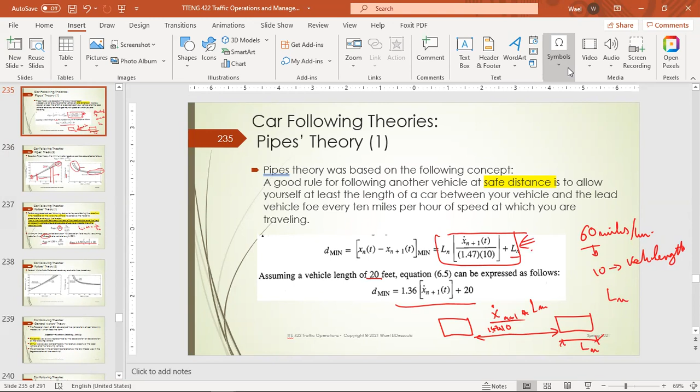When comparing the results of Pipes' equation with the field data, we can see that he is underestimating the safe time headway compared to the observed data, and also the safe distance gap at high speeds. He is underestimating the safe distance, and at low speed also he's underestimating the minimum safe distance headway.

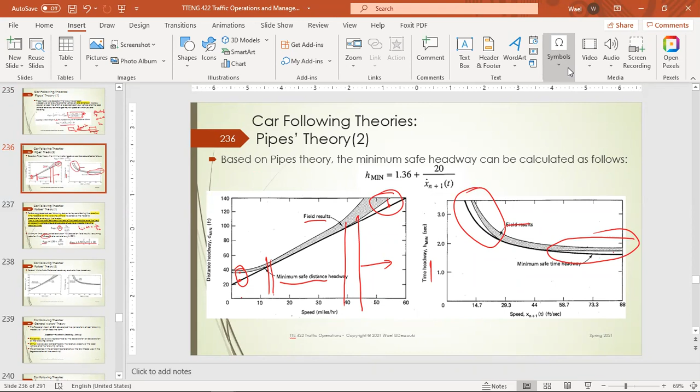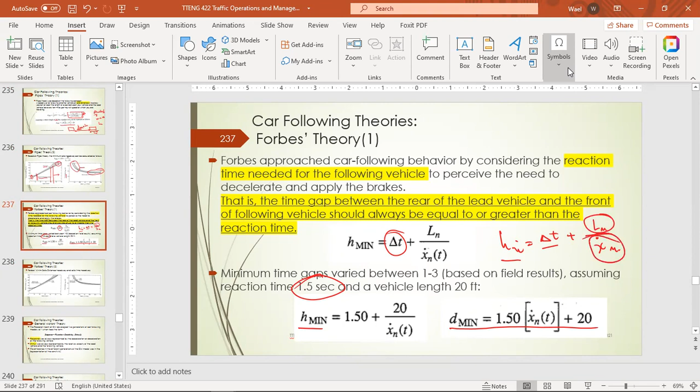However, later on, Forbes proposed something different. He said that reaction time is the governing factor, and the following car usually tries to maintain a distance gap proportional to, or a function of, the reaction time needed. So he mentioned that the minimum headway will be delta t, the reaction time, plus vehicle length divided by the speed of the lead vehicle.

When comparing Forbes with the field data, we see that he was able to treat the high speed minimum safe distance headway well. However, in the mid-range he was too conservative, but at low speed he was not conservative. As you can see, there is inconsistency, and both Forbes and Pipes models suffer from one major issue, which is their linear relationship. However, in reality, the field data shows there is non-linearity in the relationship.

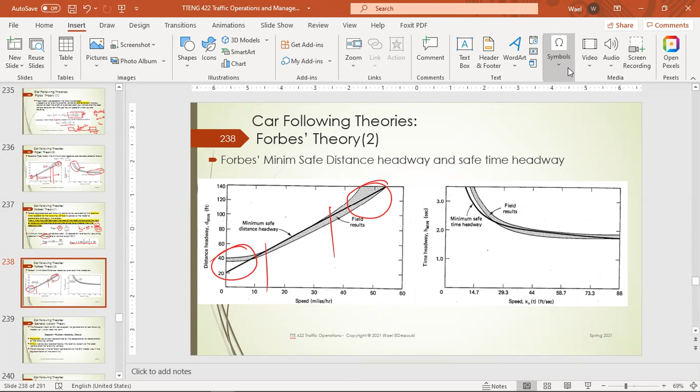So the third approach was started by General Motors, and they built their theory on the following: that the response of the following car is a function of sensitivity and stimuli. What is the stimuli in this case? Basically the response is either acceleration or deceleration. And the stimuli here was always delta x dot, the difference in speed between the lead vehicle and the following vehicle. Sensitivity, that's basically the key in all five models.

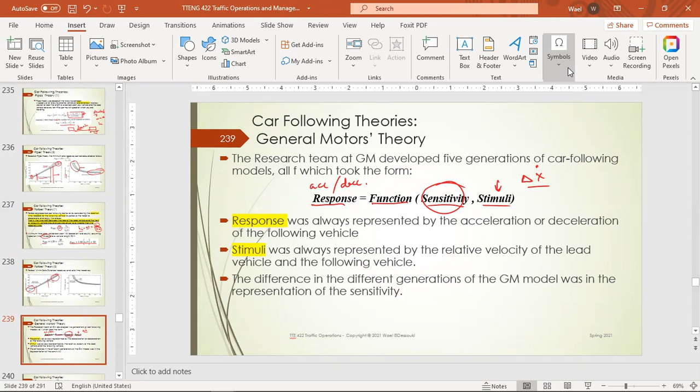That's the key difference in the five models developed by General Motors. So we can see here the first model: it said that the response, which is basically the acceleration of the following vehicle, equals alpha, a sensitivity factor, multiplied with the difference between the speed of the lead vehicle and the following vehicle. From field data, they found that the minimum reaction time is 1 second, the maximum was 2.2, and the sensitivity alpha ranged from a minimum of 0.17 to 0.74. The average was somewhere around 0.37.

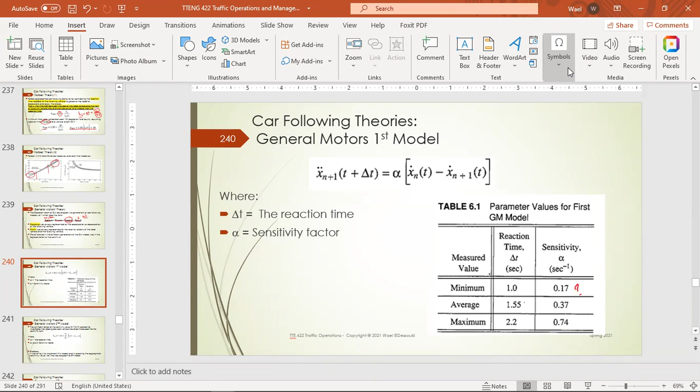So now the dilemma: which value to use, this one or this one or this one? So they came up with a second model where they stipulated that we have two values, either the minimum or the maximum, which made things more complicated and resolve the issue in a kind of judgmental way.

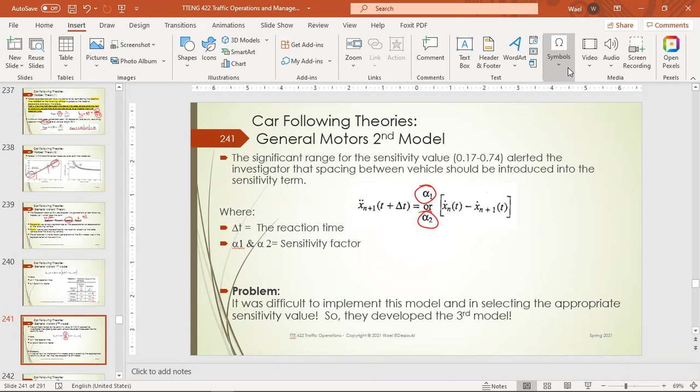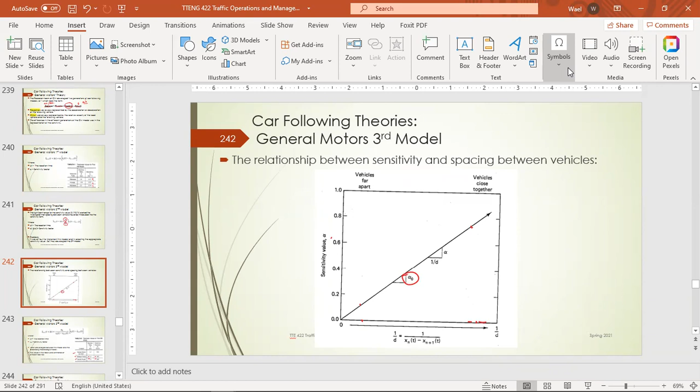In order to eliminate that, they studied the sensitivity value alpha versus the inverse of the spacing between the two following cars, and they found a nearly perfect straight line relationship between 1 over d and the sensitivity. The slope of this line was alpha naught, and that was the milestone in developing the third model. So the third model came like this: alpha naught divided by the spacing between the two vehicles, multiplied with the difference in speeds between the lead vehicle and the following vehicle.

As you can see now, this model started making sense. However, it was a dilemma for alpha naught. They did several tests in the General Motors test track, and they came up with delta t reaction time of 1.5 as an average value, and 40.3 for alpha naught.

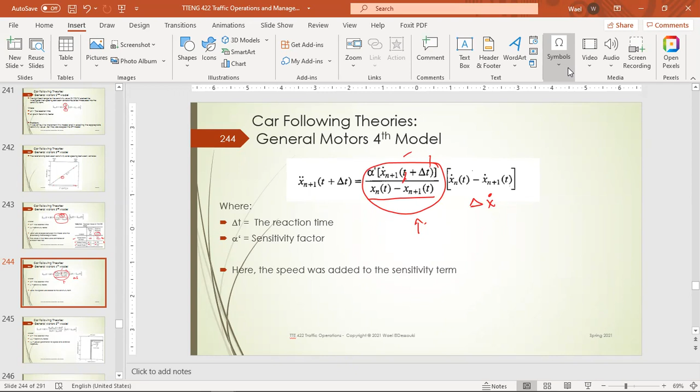As you can see, in all five models, what is changing? The alpha, or the sensitivity factor, is changing. So they made a generalized form of the model, which is basically the fifth model: alpha l,m multiplied with the speed of the following car to the power m, divided by the spacing between the two vehicles to the power l, multiplied with the delta speed, the difference in speed. That will give us the response.

If you substitute for l here, and this for m, and this as zero, at this point that's the first and second models, because the first and second models didn't have these two terms. For the third model, L equals 1, so we have this difference term, but the speed term is not there. The fourth model is 1 and 1, both terms existing.

In reality, we showed that yesterday, that for the third model we were able to do a mathematical assessment and reach the bridging from this microscopic behavior to the macroscopic flow model of Greenberg.

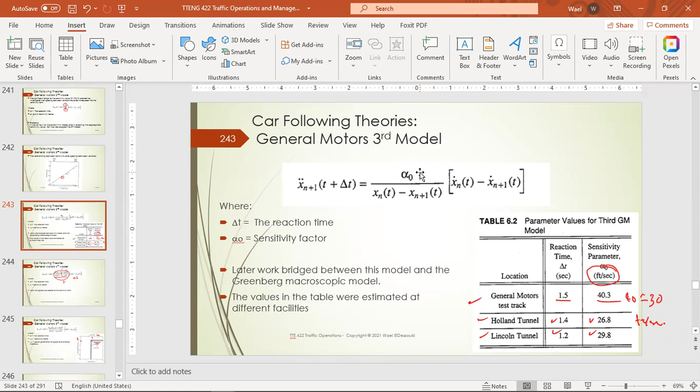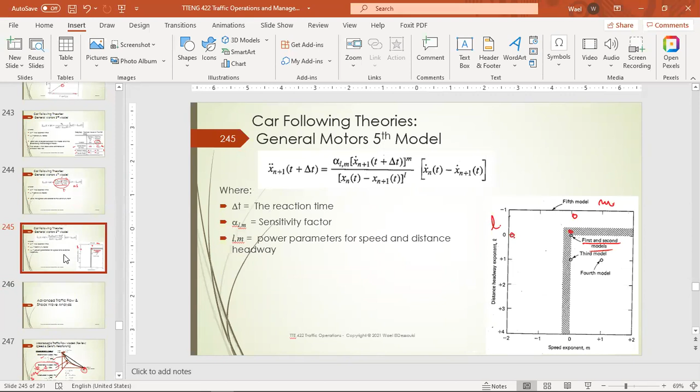So that's going to be it for the car following models. Now we shift to the speed density, or the flow models. So basically the flow models, as we mentioned, it's...

Started first, we agree that where there's a traffic jam, this is maximum density, zero flow at this point. Here, zero density, max speed, which we can say is VF, free flow speed. But here at maximum density, zero flow, zero speed. All models agree on this, and this makes sense: V equals 0.

However, what goes in between this point and this point has been debatable between researchers and scientists. However, Greenshield was one of the pioneers in 1934. He assumed a very simple linear relationship between both points, so he said that the speed will start decreasing linearly as the density increases, and he came up with this nice model, where VF is the free flow speed.

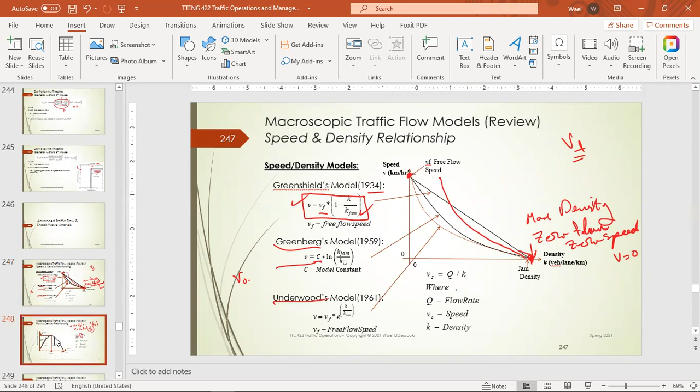Clear? Now for the flow density diagram. Flow is basically the speed multiplied with density, so Q equal V multiply K. But if we say, for example, that we have a Greenshield model, which is V equal VF times 1 minus K over K jam, then we can say that Q equals VF multiply K minus K squared over K jam.

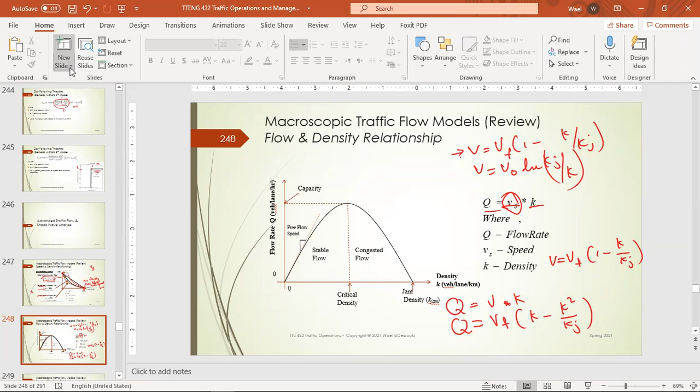As you can see, this is a parabola, a second order, second degree equation. However, we can get some characteristics from these relationships, as we will see now. Some properties for the Greenshield model.

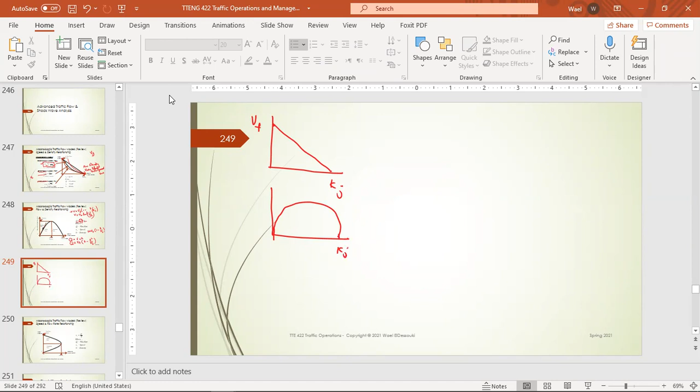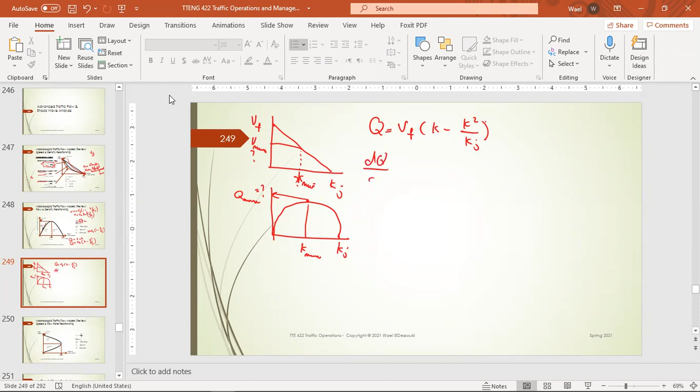We want to determine for Greenshield what these values are and what the maximum flow rate is. So we have Q equal VF multiply K minus K squared over K jam. If we differentiate dQ over dK, what shall we have? We will have 1 minus 2K over K jam equals 0, because if we take the differentiation here, that's the slope of the function, which should equal 0 at the maximum. So this means K max, the value of K, will equal K jam over 2. As simple as that.

Now we want to find the speed at Vmax. Vmax equals VF times 1 minus K max over K jam. So this will be VF times 1 minus (K jam over 2) over K jam. That means this term will become half. So Vmax equals VF over 2.

That means Q max equals Vmax multiply K max. Substituting with these values, we have VF over 2 multiply K jam over 2. We will have VF K jam over 4. That's the maximum flow rate according to a Greenshield model.

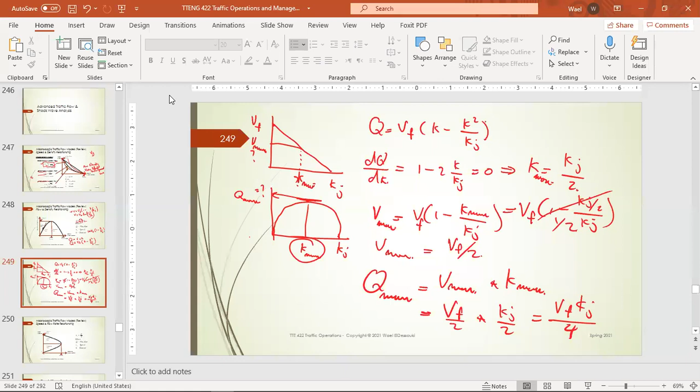Clear, guys? Okay. Now this is the speed and capacity, or speed-flow rate function, which is basically the relationship between the speed and Q divided by K.

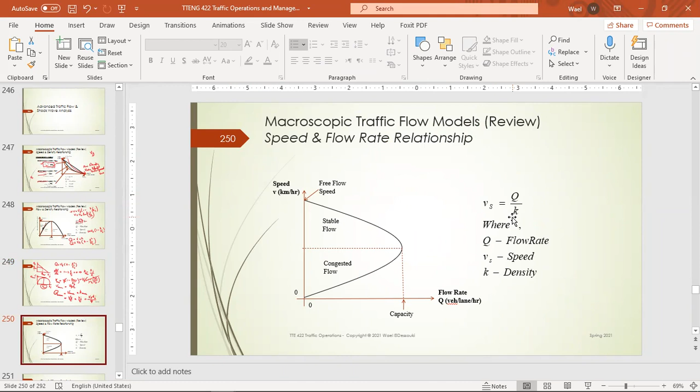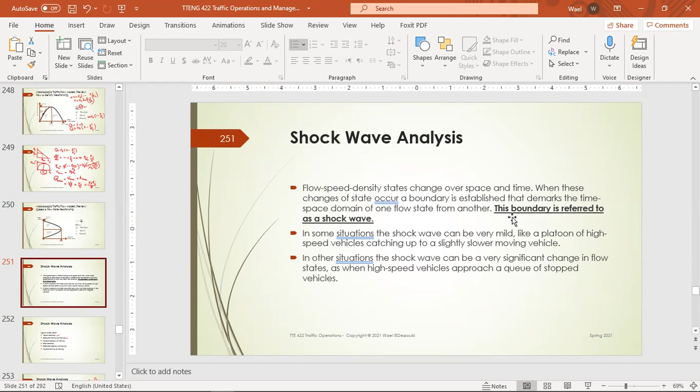And now we start with the shockwave analysis. The shockwave analysis, as we mentioned, is basically a boundary between two states of flow. That's the basic definition of a shockwave, and this boundary might be going forward or going backward. If it's going forward, then it's forward recovery—that means cars were slowing down and now they are accelerating their speeds, and the wave is progressing—or frontal stationary, or forward forming.

Then there's the backward case, which is the most common that you can see, especially at traffic signals. When the signal turns red, the queue starts building up—this is backward forming because it's forming a queue. When the signal turns green, vehicles start moving—that's what we call backward recovery here. Vehicles were stopped and they start recovering from being stopped. Backward forming is when vehicles start stopping and forming a queue.

Any questions so far? Okay, we're going to stop here.